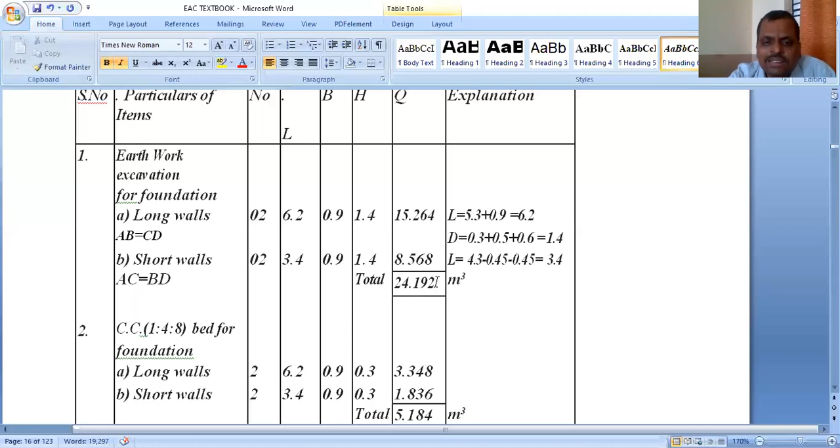Now the second item which we are going to see is cement concrete for the bed, cement concrete for the bed in foundation. That means below, the first thing after the excavation is we have to lay this foundation bed. We have to lay just the foundation bed of 0.3 meter thickness. That means the depth of the PCC bed is 0.3 meter.

Now, what we have to do is find center to center distances of the long wall as well as short wall. Here, long wall is AB equals to CD. The numbers will be 2, no doubt the numbers will again be 2. Now this 6.2, how to calculate?

Now the width of excavation is normally equal to the width of the CC, that is plain cement concrete. Sometimes it is called cement concrete, but normally it should be called PCC - instead of calling it CC, call it PCC, it will be more descriptive. So plain cement concrete of mix 1:4:8 as a foundation bed, its depth is 0.3 meter, and there are two number of long walls, and this width is common. So the length of excavation of the long wall as well as the short wall remains constant.

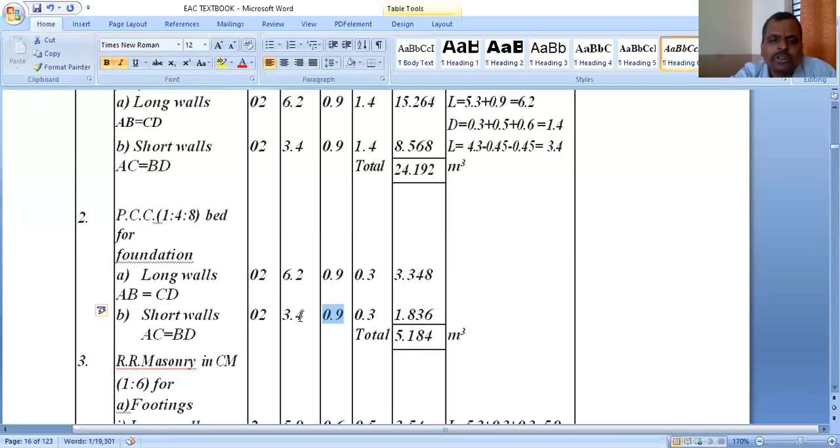0.9 meter, that is the single width of item. One width of item we have to deduct to get the length of short wall. So 4.3 meter minus 0.9 will give you 3.4 meters, the length of the short wall. The width of the short wall or the breadth of the short wall is no doubt 0.9 meter, and the depth of this PCC bed is 0.3 meter, that is near about 1 feet, and then we just multiply this, we'll get the quantity as

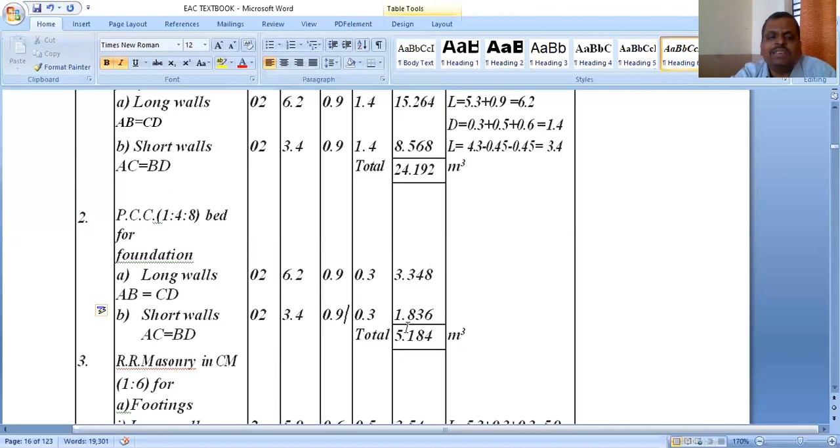1.836. So to get the total quantity of short wall as well as long wall, we just go on adding this, it will be 5.184 cubic meter. How much it will be? 5.184 cubic meter. Now just try to note down these things.

When I am telling you, you have to just prepare a measurement sheet, write these items and try to solve it. What will happen due to this? When I am speaking, I am giving you some time. In that given time, you can actually use the calculators also. Because of that, what I am doing is, I am first of all explaining in English as well as I am explaining in Marathi, so that you can get the time.

So to prepare this measurement sheet, as well as you have to refer this room, just prepare a plan of 5 by 4 meter. The width of the brickwork is 0.3 meter and the width of the foundation is 0.45 meter. In this manner we can very easily understand to calculate the quantity of items. So the second item we have completed.

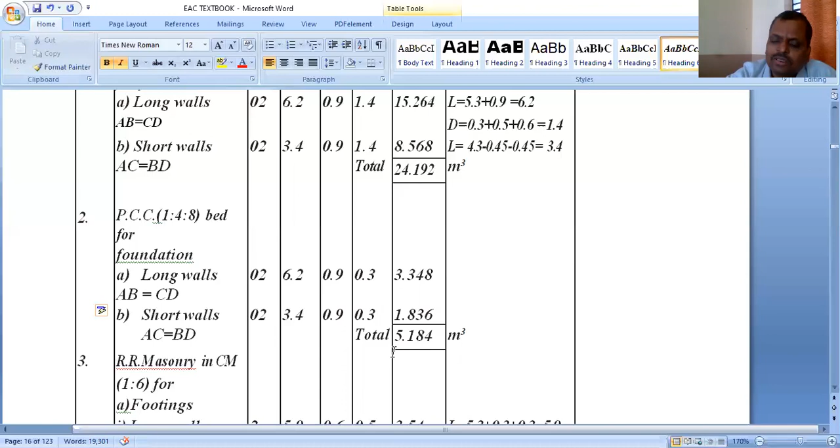Now we'll go for the rubble masonry, RR masonry in cement mortar 1:6.

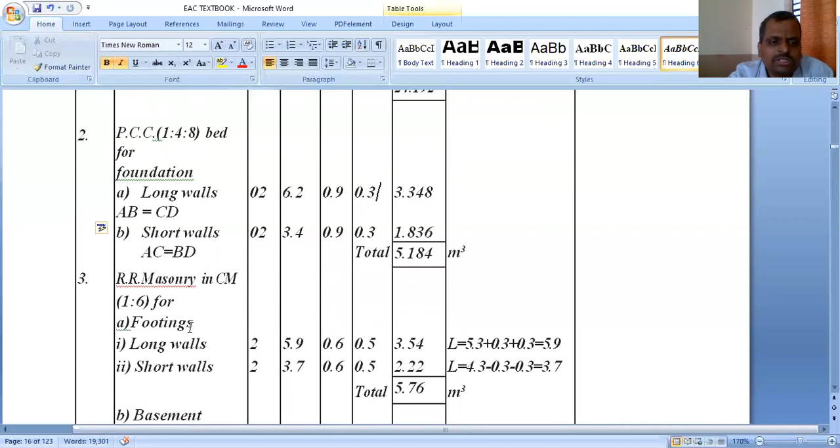Now the next which we are going to see is nothing but the rubble masonry in cement mortar 1:6. Here cement mortar they are going to use, where they are going to use first of all for the footing. What they have given is, they have given us the footing.

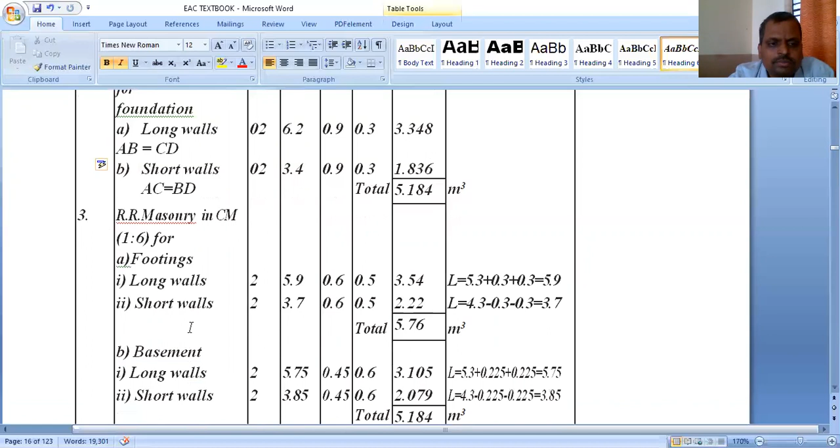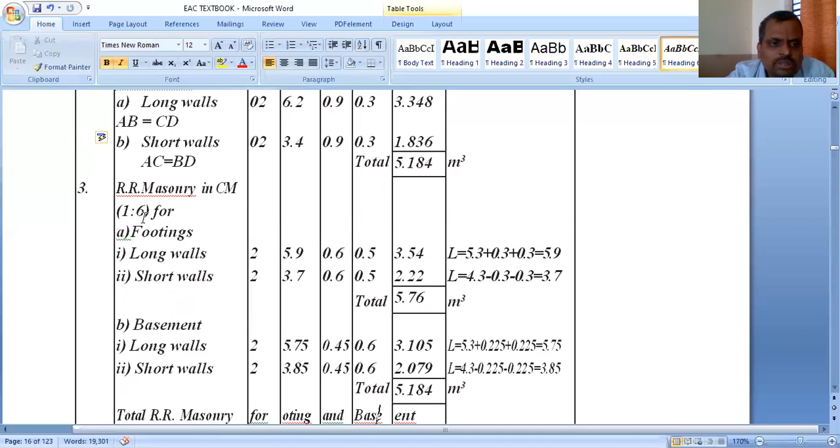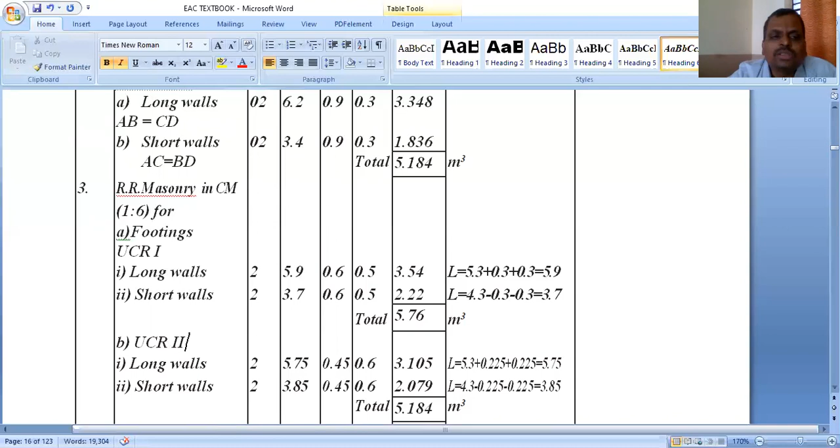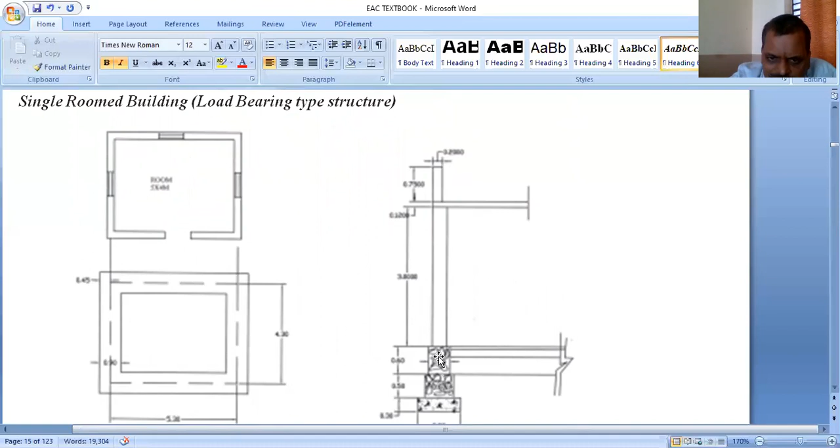Where are these two steps? If we go to the section of the problem, we can easily understand this. Now this is step 1 of UCR and this is step 2 of UCR. Let's go through it from the beginning. The first thing we do is the PCC. Above that will be UCR step 1, and then UCR step 2. In this manner, we calculate the values of different items.

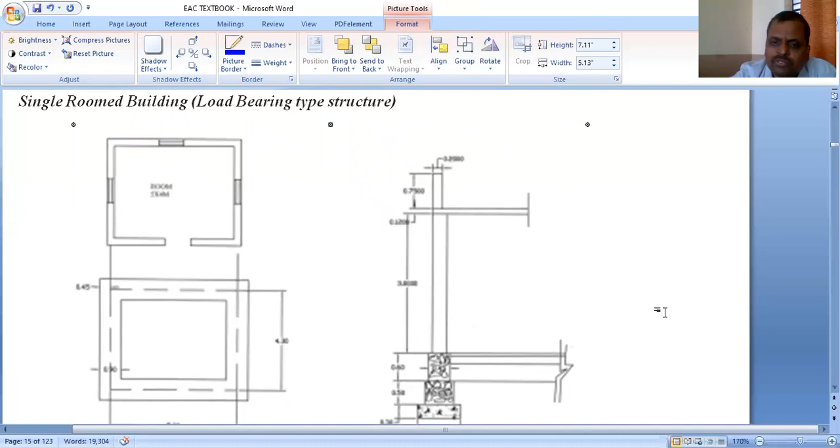Now see here, this is the UCR masonry. So what about step 1? Here again we consider the long walls and the short walls. First of all, we have to find out the length of the long wall and the length of the short wall. So how to find it out? It is also very easy.

Initially we have calculated the center to center distances of AB equals to CD. These are the two walls.

While solving or explaining the procedure, I am also typing so you can easily understand and have some time to go through it and note down the things. Try to solve along with me. While I am explaining, take a rough notebook and try to write these down. Afterwards you will refer to the notes and reference books, and it will be very easy at that time. But for now, try to understand this.

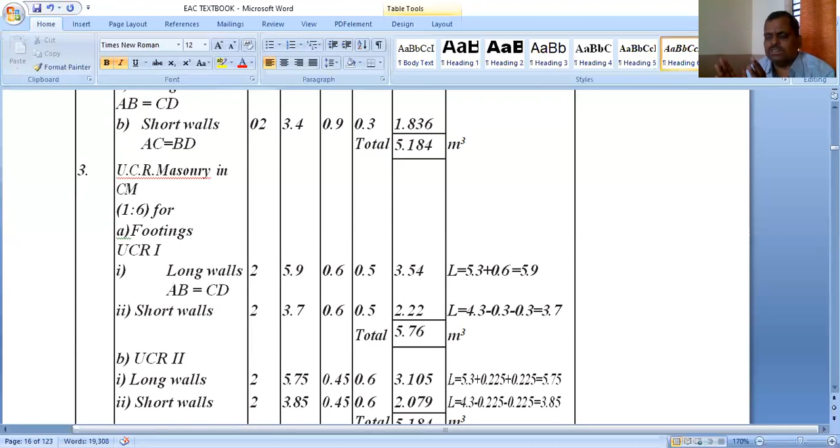Instead of writing half plus half, always try to write one width of item. It will be easier for you during calculation, while writing it in the notebook, and while remembering it at the time of examinations. So in this way we'll solve it: 5.3 plus 0.6 gives 5.9 meter respectively.

In the same way, you have to calculate it for the short walls. Which are the short walls? The short walls are AC equals to BD. These are also two number of walls.

So initially we calculated the center to center distances. It was 0.3 by 2 plus 4 plus 0.3 by 2, which worked out to 4.3 meter. Instead of writing 0.3 by 2 plus 0.3 by 2, you have to always write it as center to center distance minus one width of item. The width of item here is 0.6 meter. So it will be how much?

It is 3.7 meter respectively. So we are able to calculate the long wall's length and the short wall's length. See here what is happening: the length of the long wall is coming lesser, that is, from 6.2 meter it dropped to 5.9 meter. Whereas the length of the short wall is increasing, from 3.4 meter it has now taken the value of 3.7 meter.

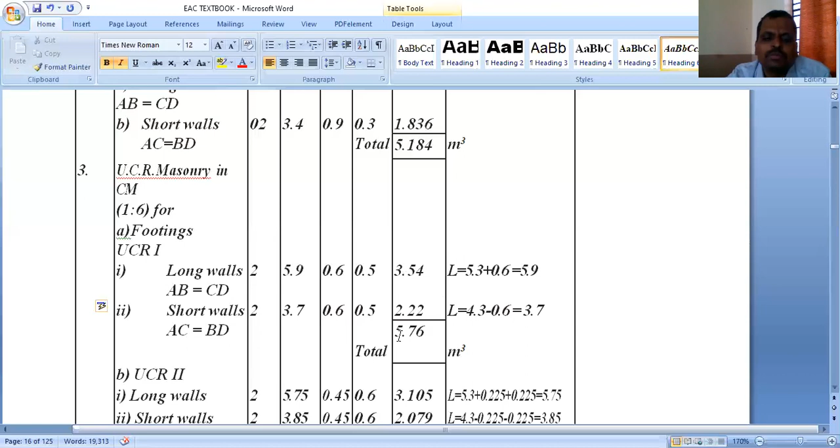In the same manner, here UCR step 2 is given, having a depth of 0.6 meter and the width given as 0.45 meter. Then we will complete UCR step 2 and stop here today.

Don't worry, so for the long wall we have to calculate again. We have already calculated the center to center distances of AB equals CD. Here AB and CD are the two walls, so I have written 2.

Now we calculate the length of the long wall and the length of the short wall. For UCR step 2, the width is given as 0.45 meter. The center to center distance is 5.3 meter and the width of one item is 0.45 meter, giving 5.75 meter.

In the same way, we calculate the length of the short wall, which equals center to center distance minus one width of item. Instead of writing it twice, we'll write 0.45 here, giving 3.85 meter.

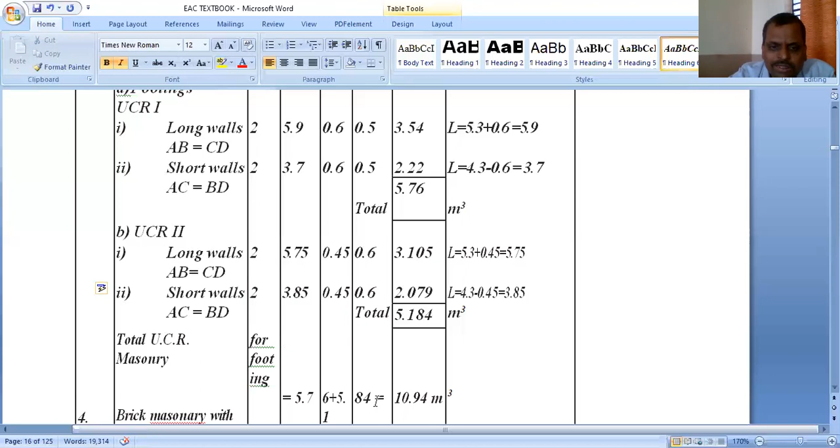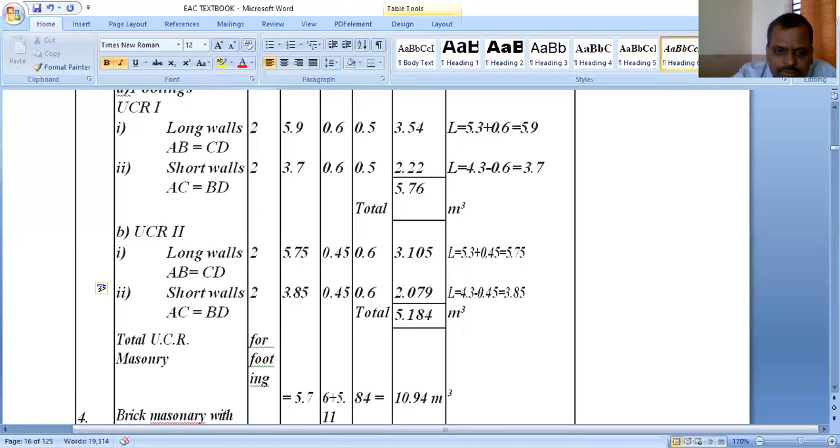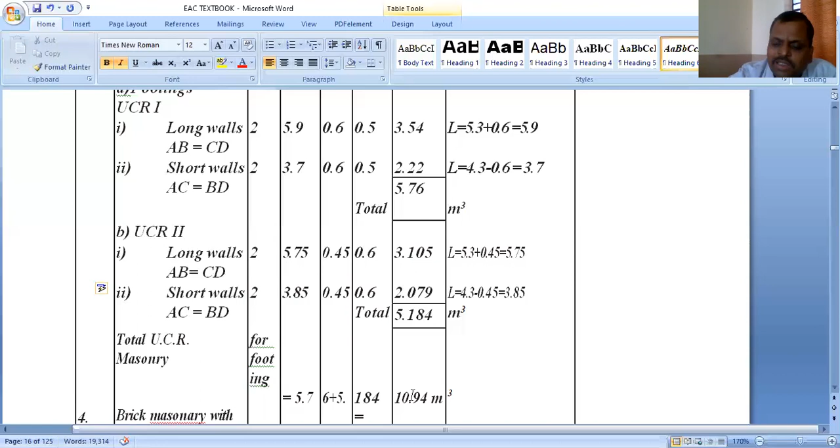So this 5.76 plus 5.184 here, it will be 10.94 cubic meter. In this manner, you have to find out the masonry for step 1 and step 2.